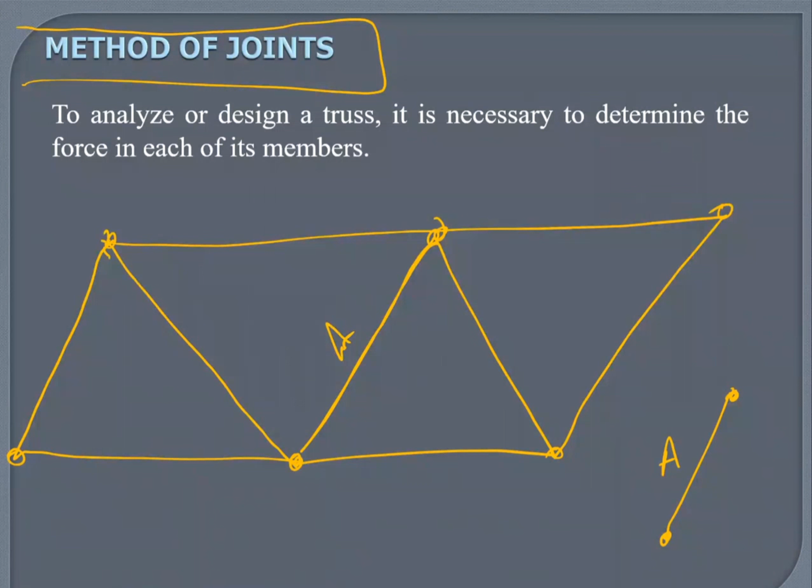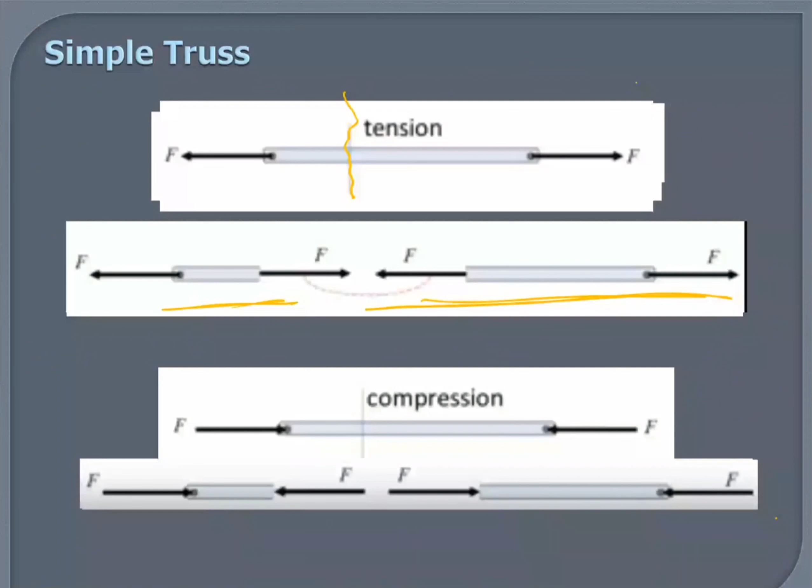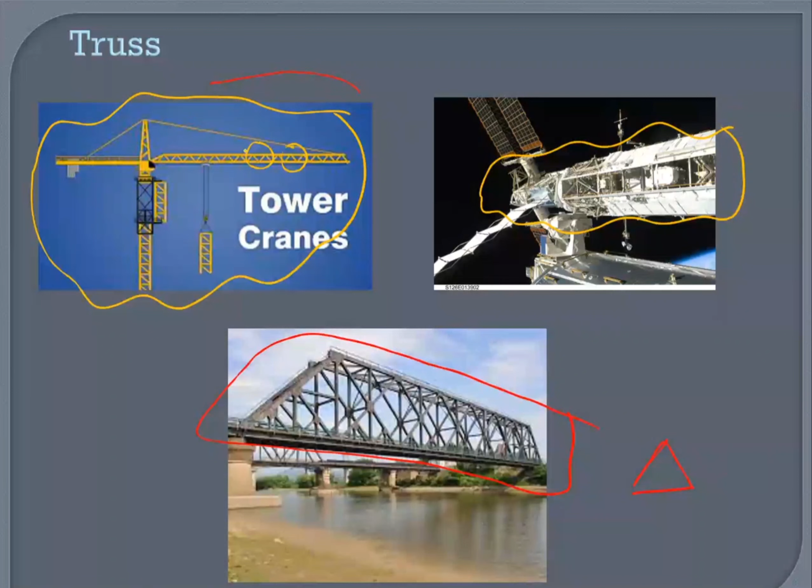Let's go through the slide, then we'll do some exercise. To analyze or design a truss, it is necessary to determine the force in each of its members. If you do not do that, how are you going to design a crane? You need to design a platform for the space station. You need to know the forces on each member so that it doesn't buckle, bend, or break.

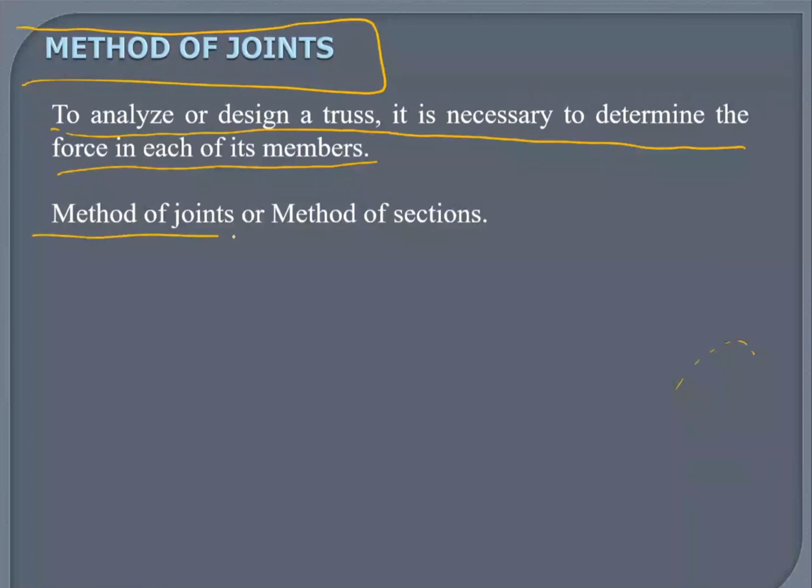So, method of joints or method of sections. Method of joints is based on the fact that if the entire truss is in equilibrium, then each of its joints is also in equilibrium. Therefore, if the free-body diagram of each joint is drawn, the force equilibrium equations can then be used to obtain the member forces acting on each joint.

I've got a truss here and a truss here, pin connected. That's pin A, B, C, and D. I can do analysis on pin A. I'll draw pin A and put a force here for this member, a force here for this member, and a force here for that member. So I'm using a pin. I'll show you in the slide.

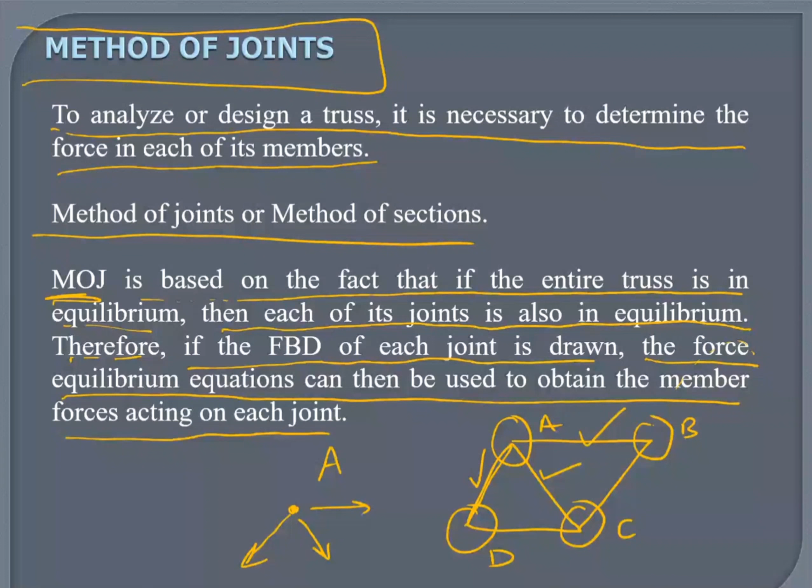So method of joints, relatively easy. The correct sense of direction of an unknown member force can, in many cases, be determined by inspection. When assuming the direction of a force, you can use a bit of common sense to figure out the direction. But don't worry, if you get it wrong, the answer will tell you.

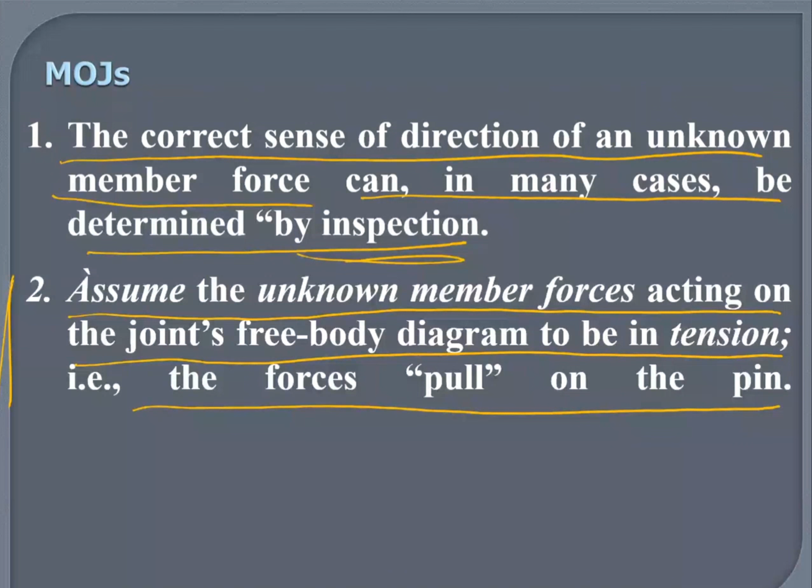Assume the unknown member force acting on the joint's free body diagram to be in tension - that is, the force pulls on the pin - or you can assume it's in compression. I won't stick to one point, but it makes life easy. Whatever you assume, stick to it. The answer will tell you if your assumption is right or wrong.

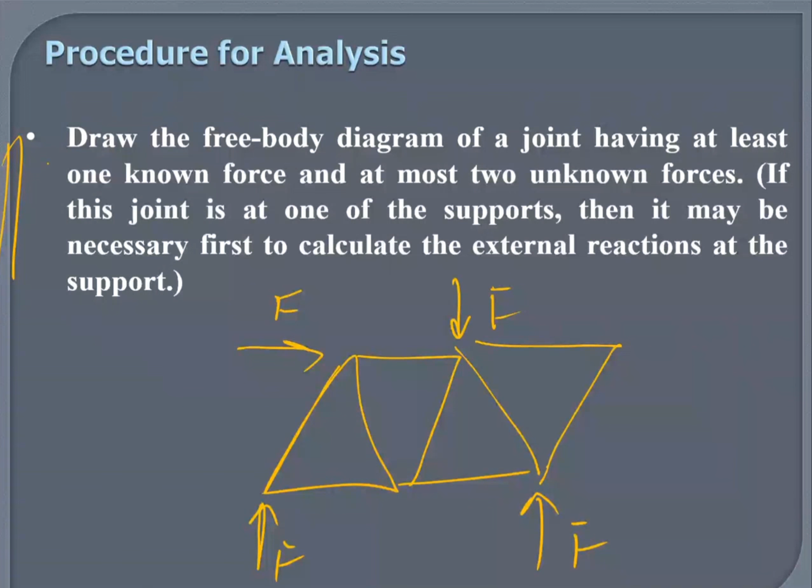Then draw the free body diagram of the joint - this is very important - because you've got a truss, so many trusses. Force may be given here, here, here, a force may be given here. So draw the free body diagram of a joint having at least one known force and at most a maximum of two unknown forces.

For example, if I've got this structure here and I want to know the force at this point, I cannot draw the free body diagram of point A, because then I've got a force here, here, here, and here - sum of all the forces, all unknown. I should start from a point where I've got one known and two unknowns maximum.

That's what it says here. Let me read it again for you. It says: draw the free body diagram of a joint having at least one known and a maximum of two unknown forces.

If this joint is at one of the supports, then it may be necessary first to calculate the external reaction at the support. Let me draw the truss here - another truss, another truss, another truss. I've got force being applied here. This is a support, and this is also a support, and I've got a force here. Now I want to do the analysis of this.

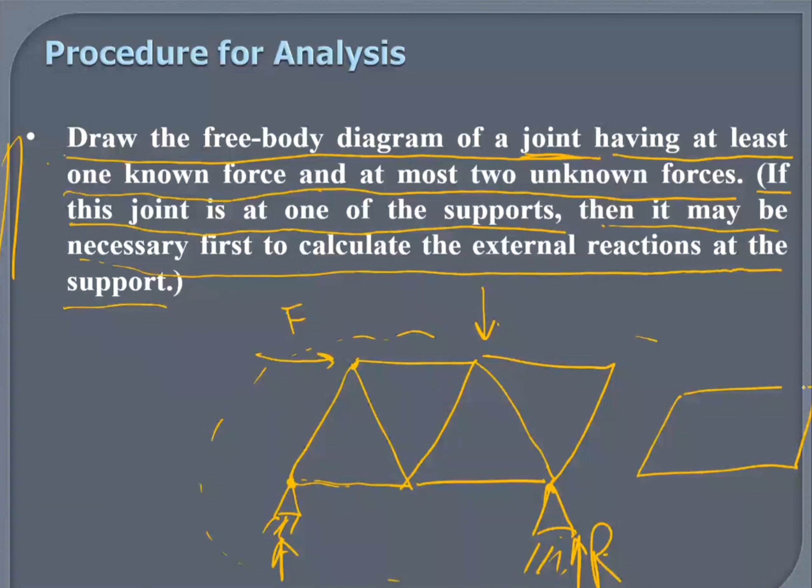So I've got two supports. I will be able to get the reaction of the supports if I look at the equilibrium of the whole system. For the whole system, I will have a structure with R1 and R2, with force being applied here and here. This is the equilibrium of the whole structure. If I look at the equilibrium of the whole structure, I will be able to get my R1 and R2 out. Am I right?

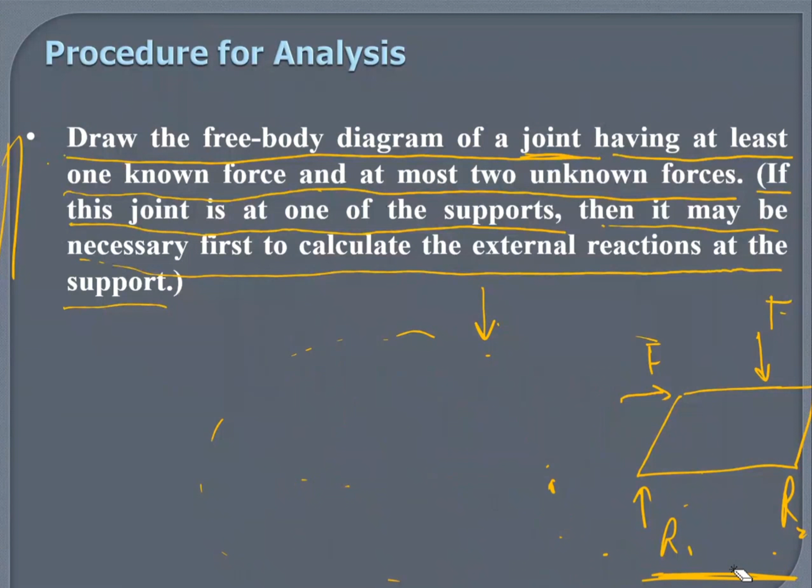Yes, sir. So once I get my R1 and R2 out, I can apply it here and then start doing analysis inside the members. Don't worry, we'll do an example and it will be very clear to everyone. Just stay with me, and this will be very much clear when we do the exercise.

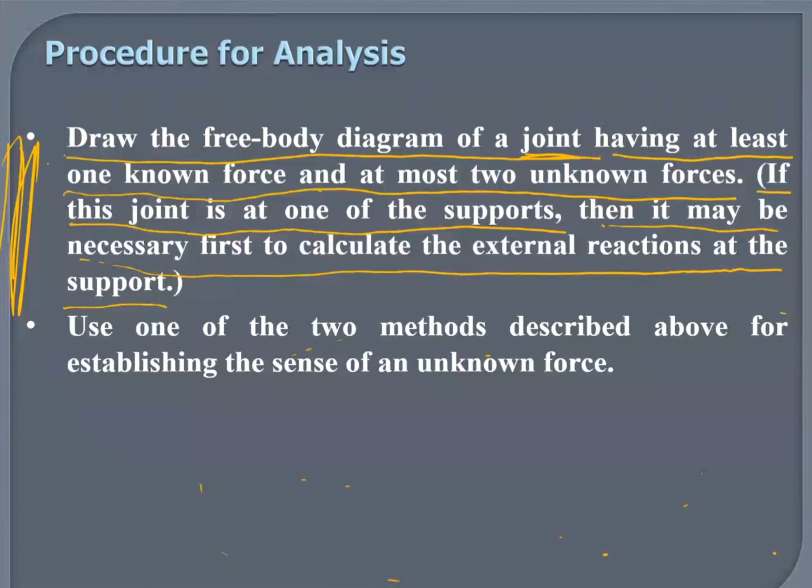Use one of the two methods described above for establishing the sense of unknown force. You have to orient your x, y coordinates in the right way so that applying the equations of equilibrium is relatively easy. I've already covered this before.

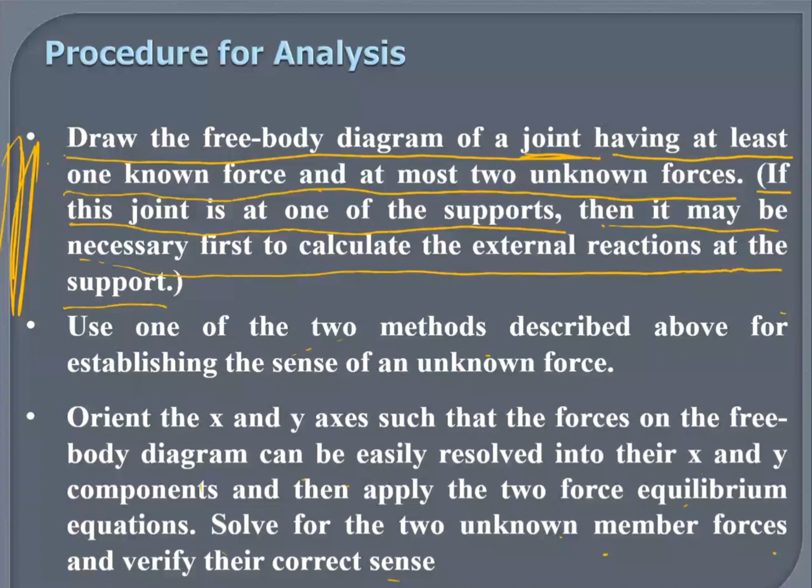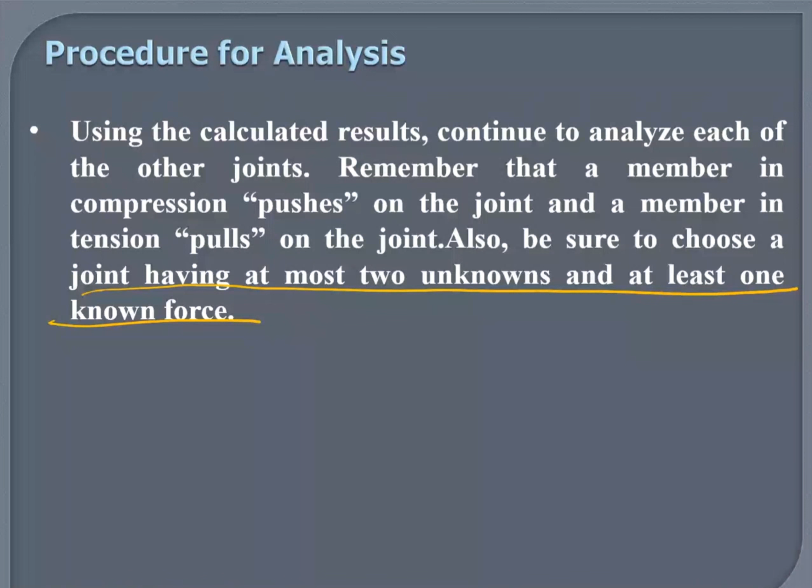Use the calculated results to continue analyzing each member or joint. Remember that a member in compression pushes on the joint, and a member in tension pulls on the joint. Also be sure to choose a joint having at most two unknowns and one known force. I've been reinforcing this again and again: you start your analysis from a joint which has one known and a maximum of two unknown forces.